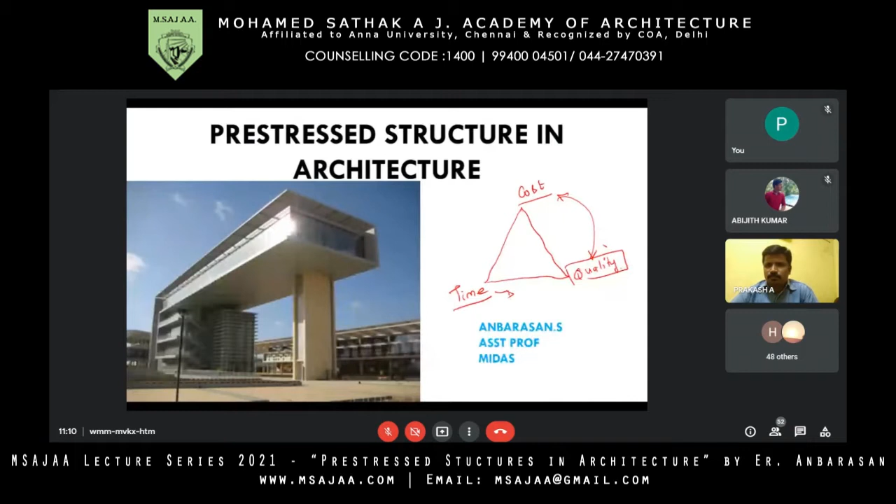So the prestressed type of structure will have these three concepts. I mean, it will be completed on time, and cost-wise, it will be very optimum when compared with the normal RCC type of structure. Then quality: the lifespan of the structure will be much higher when compared with the normal RCC type of structure. Let me first describe the basic difference between concrete, reinforced cement concrete, and prestressed concrete. Hopefully you all heard about the concept called concrete.

So it's a composite material which will have fine aggregate, coarse aggregate, water, and cement. This is a composite material which will have cement, fine aggregate, and coarse aggregate. Along with that, if we want to enhance certain characteristics, we will have one more material called admixture. Say if you want to increase the setting time of the concrete, we can go ahead with mixing of the admixtures.

And characteristics. Concrete is used universally because it has wide characteristics. First one is its durability, next is the modulus of elasticity, and the third one is change in volume. Hopefully you may have heard concrete is elastic in nature, so it will have a tendency to contract and expand. Next is workability. The minimum setting time starts with half an hour to a maximum of 24 hours. Next is strength, and next is cohesiveness. Due to these wide characteristics we've been using it universally.

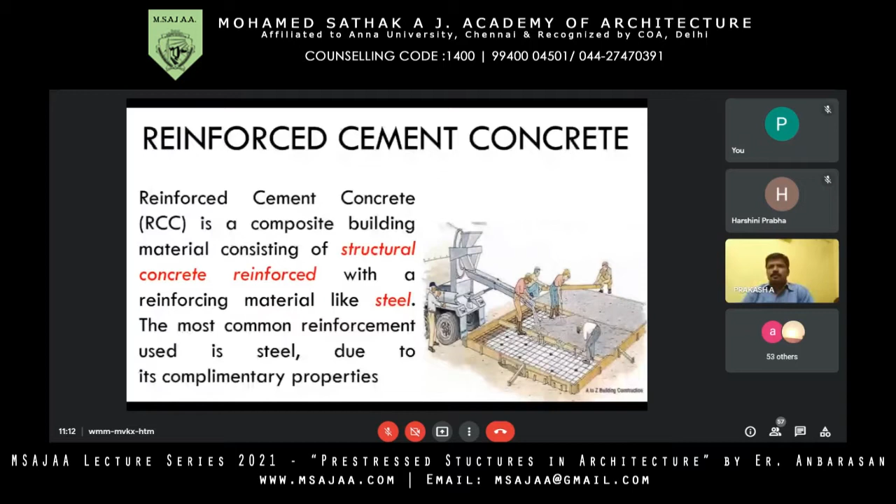And the next is reinforced cement concrete. Along with the concrete, we are using reinforcement. In order to increase the tensile strength in a structure, we've been using reinforcements. There are different types of loads in a structure, wherein I just said about the tensile load. Apart from normal live load and dead load, we have wind loads.

So a structure should be stable in order to take up the wind loads, or if there are any seismic impacts. A structure should be designed based on analyzing the seismic characteristics. Then if it is predominant to snow, we have to take into account the snow load also. So there are different types of loads to be considered while designing.

And these are the unit weights of different materials which we use in a structure. Brick has a unit weight of 18.8 kilonewton per meter cube, plain PCC is 24, RCC is 25, timber is 5 to 8 kilonewton per meter cube. So while designing a structure, we need to consider the primary load of each and every component we are about to use. Moving to the primary concept, prestressing. There is a basic concept behind using steel and concrete in a structure.

So in steel, steel is strong in tension and it's weak in compression. And in terms of concrete, it's strong in compression and weak in tension. So pre-stressing is ultimately related to the weakness of the concrete.

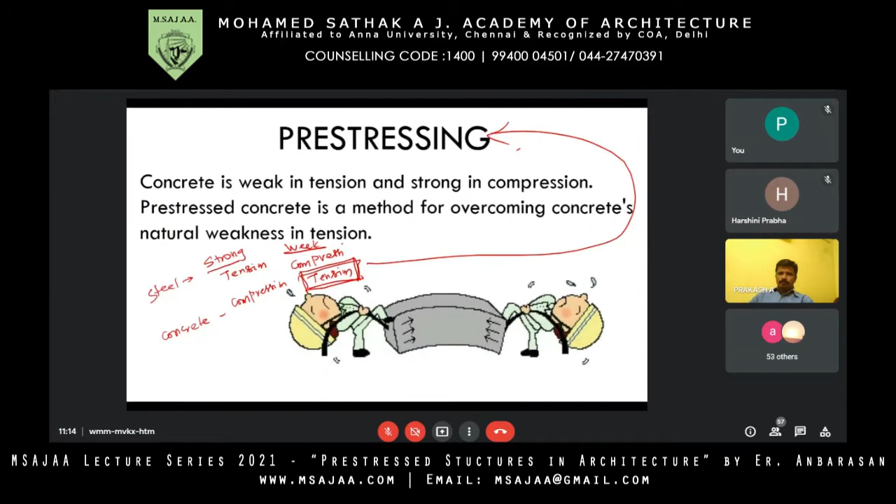Okay, so in order to improve the weakness of concrete in terms of tension, we are adopting a concept called pre-stressing. So this is how pre-stressing started to evolve. So we are going to have a normal process along with improving the tensile strength in a concrete. So this is a simple example.

A concrete beam will begin to bend when heavily loaded. So if you are using a normal plain cement concrete, then ultimately it will tend to buckle. So if the vehicle moves at a midpoint, then ultimately this leads to a failure. And in order to avoid the failure, if we are using a reinforcement in a frame or in a road, ultimately this will take up the load.

And if you are using a concept of pre-stressing, ultimately this will maximize the tensile loads because already it will attain the maximum load characteristics. So this will completely eliminate the weakness of the concrete. That's the primary concept, the need for pre-stressing.

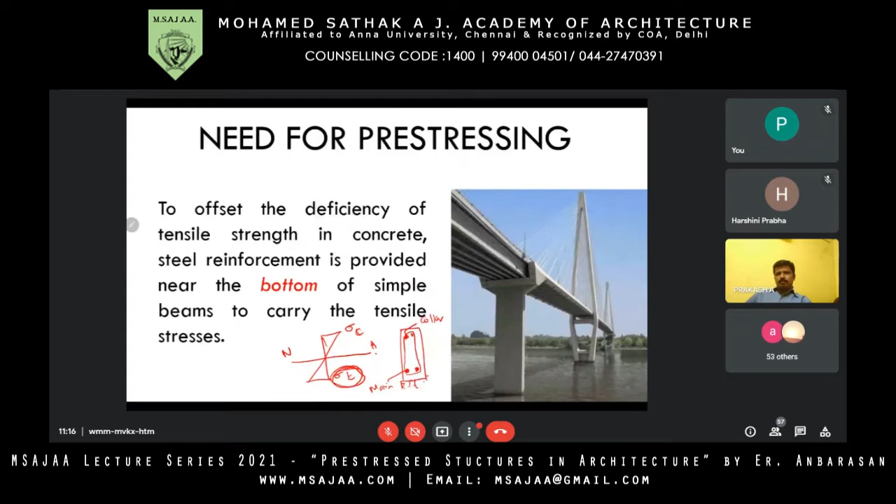So if you take any beam structure, we will have a compression and we will have a tension. So compression will happen at the top and tension will happen at the bottom. So that's the main case. We will have a bottom reinforcement in a single reinforcement. We will have collar bars at the top and the main reinforcement at the bottom, since the tensile load will occur at the bottom of any type of section, whether it is a beam or slab. So that's a primary concept.

And what is pre-stressed concrete? Okay, so if you are considering a normal beam, when load is applied, it tends to buckle in a downward direction based on the imposed load. So say if the imposed load is 50 kilonewton per meter square, it tends to buckle in this way.

If you are introducing tensile bars at the bottom, where they will take up the tensile load, when they get tensioned at the starting phase or after concreting, since the rod is already tensioned, the deflection will happen in the upward direction. So occurrence of the load and neutralization of the load will happen simultaneously. So this is how it will get balanced, the upward force followed by downward. So this is the primary concept behind pre-stressed concrete.

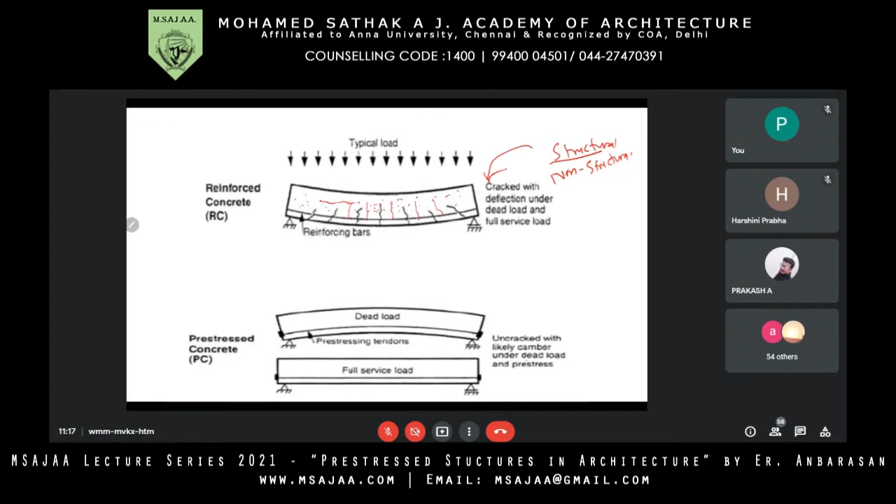And we have micro cracks. There will be porosity in a concrete. Due to the porosity and the aging of the concrete, ultimately the pores will tend to connect and form root cracks like this. So hopefully you all know that there are two types of cracks: structural cracks and non-structural cracks. So mostly the structural cracks will happen because of the porosity gaps in the concrete. So pre-stressing techniques will completely remove the cracks which will be formed in the concrete.

So we all know that after concreting, we cure the concrete for 28 days for reaching the maximum saturation time period. And if we carry out pre-stressing techniques, then ultimately we can completely retard the porosity gaps. So this will completely enhance the quality of the concrete. And this is the one which I said, the pre-stressing tendons provided at the bottom, and due to this, tension is induced in the tendons or in a bar.

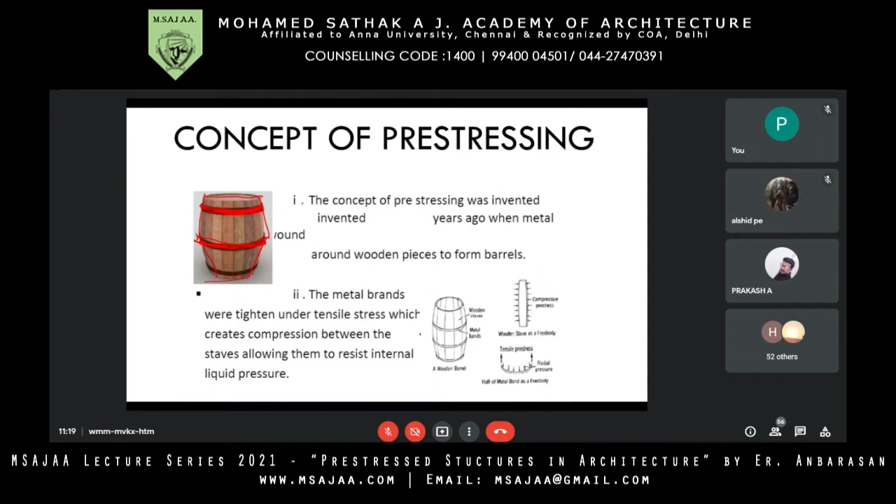So this bounding steel will ultimately enhance the tensile strength, and it will make the barrel stable. So if you are using a composite material, the material which has the maximum characteristics will ultimately enhance the quality of the material.

And this is the second example. It's the spokes of the wheel. So you can see the spokes, and you will have an outer rim. So when spokes get loosened, there will be a tightening setup like this, through which we can increase the tension.

Maybe, like in a cycle service center, you can see there will be a wheel-like arrangement. So they will cross-check the rotation based upon the tightness of the steel frames in the rims. When we increase the tension in the bar, ultimately that will reach the maximum saturation. So through which there will be a proper circle.

And in terms of concept, it will have three concepts. First is pre-stressing to transform the concrete into an elastic manner. So as I said, concrete is completely an elastic material. It tends to contract and expand. And second is pre-stressing for the combination of high strength steel. You may have heard about HYSD bars; high yield strength deformed bars can be used for the pre-stressing type of techniques along with the concrete.

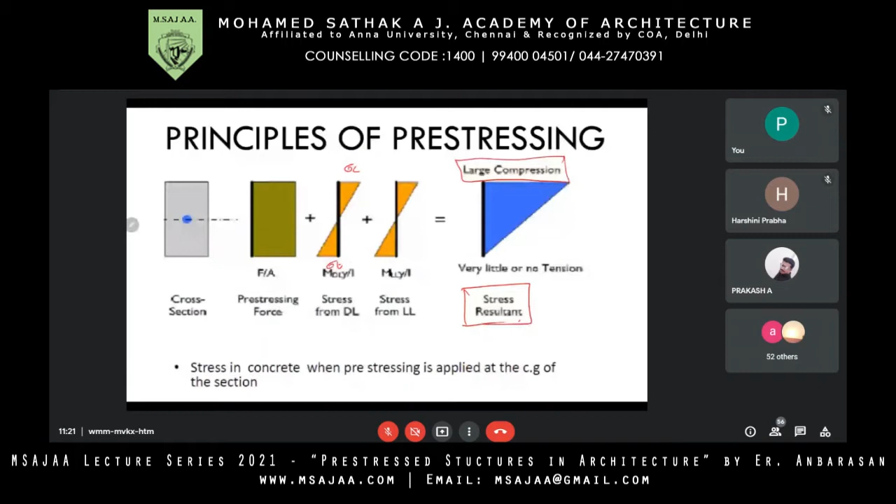Hopefully you all know that this is a cross section of the beam which has pre-stressing forces. And as I told you, this is sigma C and this is sigma T value. So this is a complete stress resultant based on the pre-stressing techniques, where we have a large area of compression. And here we are countering the tension which has been imposed at the bottom due to the pre-stressing concepts.

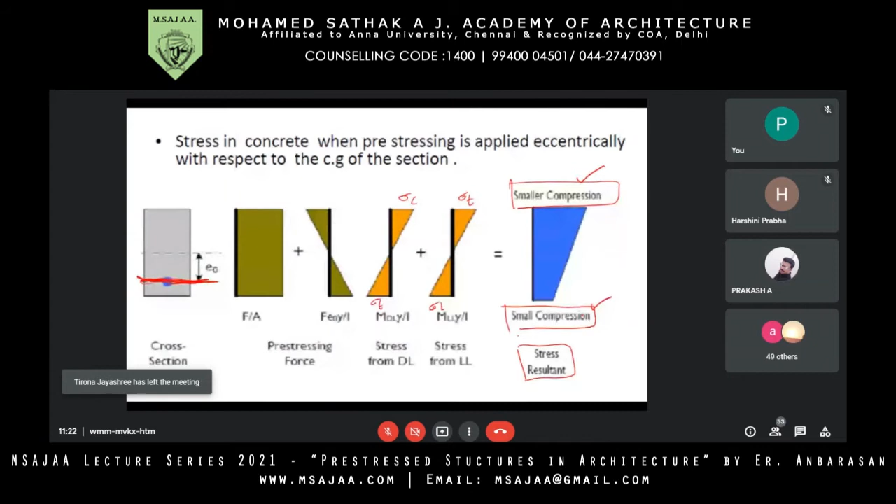Ultimately, sigma C value and sigma T value will get neutralized, or balanced, through which at top and at bottom we will have smaller compression. So this is a complete stress resultant. So ultimately the stress, in terms of compression value and tension value, gets neutralized based on the pre-stressing concepts.

Stages. There are different types of stages in pre-stressing. First one is anchoring of tendons against the end abutments, second one is placing of a jack, third is applying tension to the tendons, fourth one is casting of concrete, and fifth one is cutting of the tendons.

So this is the first stage, wherein after finishing the form works, say this is a bay where we are going to have concrete. So at each and every specific spacing, we are introducing a cable at periodical phases. So this is the first stage, anchoring of tendons against the end abutments.

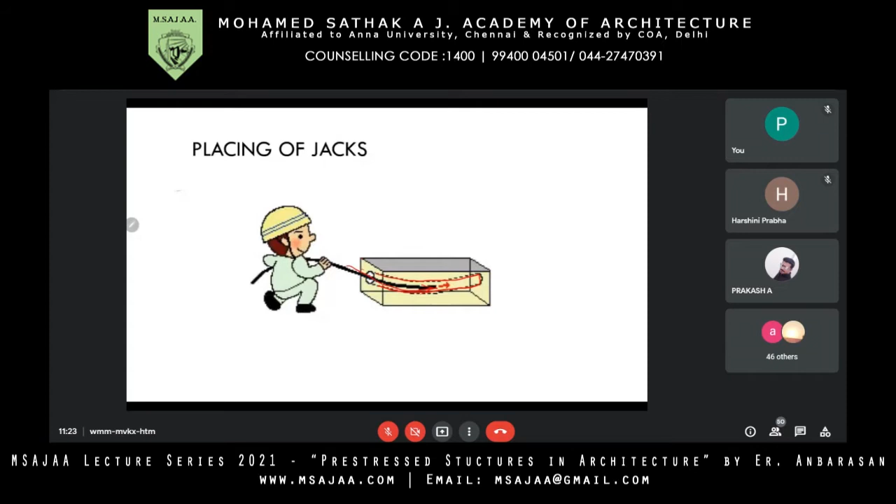And second one is placing of jack. So we are providing a pipeline and we are introducing jacks. So at the side of the column or side of the slab, we have anchoring supports. I'll show you the picture of the anchoring supports, how this will work. So at the side, we will have an anchoring support, and associated with it, we have a peg setup to hold the bars. And placing of the jack is the second one.

And the third is applying the tension in the tendons. So before introducing the concrete in a structure, we apply the tension in the tendons. So ultimately it reaches the maximum saturation point. And fourth one is after tension at both the ends, we are casting the concrete.

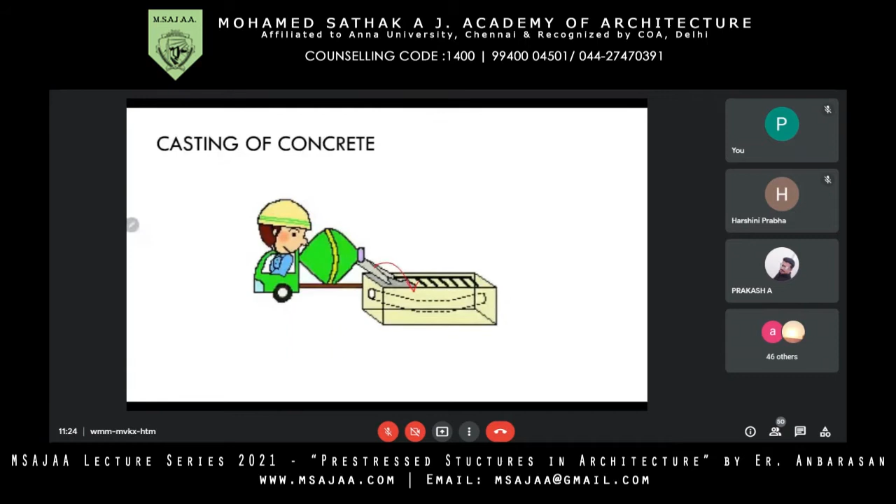So in the 1970s and 1980s, we had timber structures, timber sleepers. So when a train goes on timber sleepers, you may hear creaky sounds. It's mainly because of the contraction and expansion due to alternation in the weather conditions. The wood will contract and expand, so the spacing of the rail will get widened or contracted, due to which there will be a creaking sound.

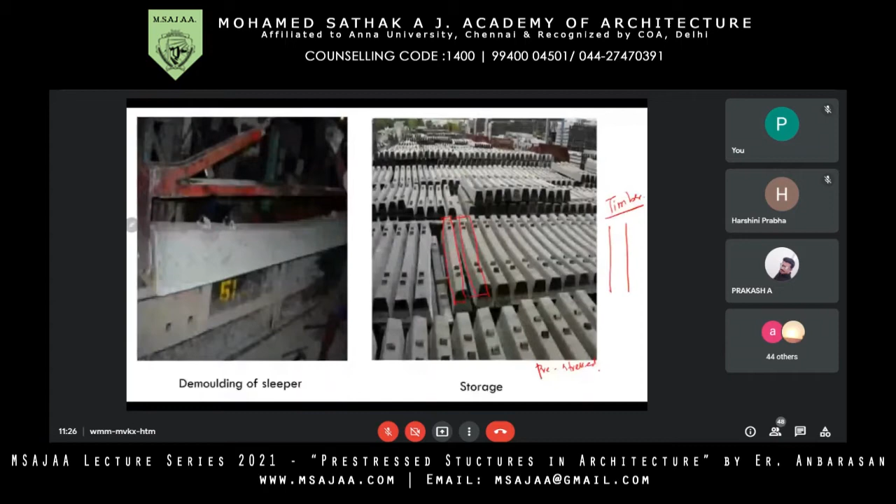So in order to avoid that, these pre-stressed sleepers are being used. These are made completely by the concept of pre-stressing. First is the preparation of the bed, and this is the end abutment or anchor supports. A hydraulic jack will be provided at both the ends, and it gets expanded at both the ends. When it gets expanded at both ends, then we apply concrete on the bed.

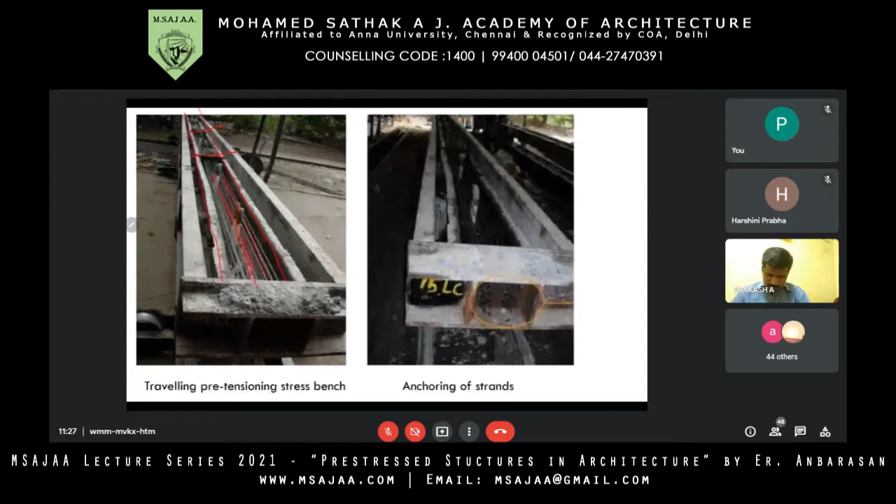And the third stage is cutting the tendons. If you have extra tendons, they will be removed. So this is a picture which shows the execution of railway sleepers. This is the big bay where we have casting spaces. Bars will be provided in this way. At the end space, look here, you will have anchoring of strands. So all the bars will be erected in this way.

And the next stage is stretching of strands. This is the hydraulic support by which it will get expanded. Look here, this is the normal space, the initial gap, and this is the expanded gap. After tensioning, this much of space is expanded.

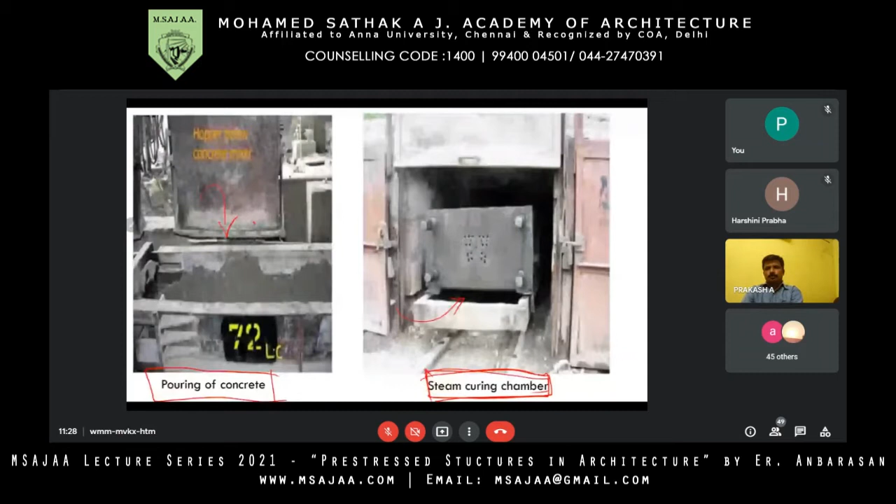So if you want to produce the concrete in a large, lump sum manner, this stage is pouring of concrete and this is the steam curing chamber. If you want to make it quickly, they introduce it into a steam curing chamber. Next is demolding, removing the sleepers from the formwork. Next is storage. Initially they immerse them in water for 28 days, then this is open storage. So this is how pre-stressing works in a linear way.

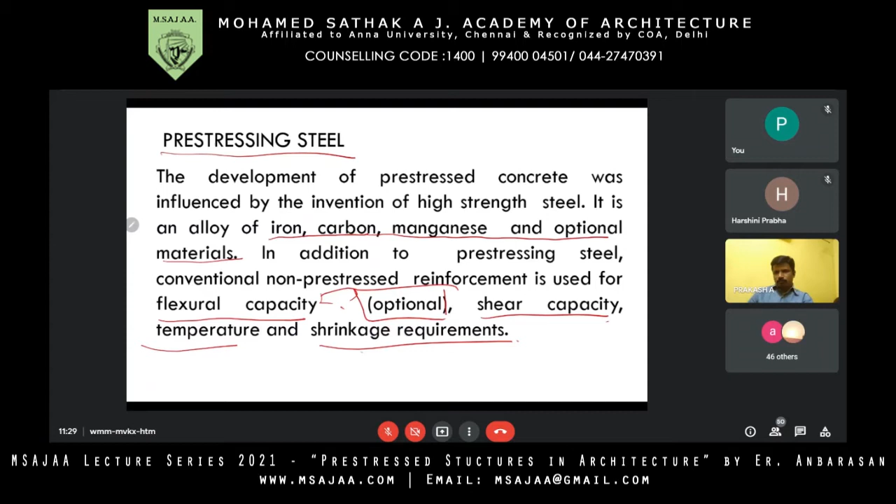Pre-stressing steels. As I told you, pre-stressing steel plays a vital role in this type of concrete structure. It is a combination of iron, carbon, manganese, and optional materials. Conventional non-pre-stressed reinforcement is used for flexural capacity; it's optional in terms of flexural capacity, shear capacity, temperature, and shrinkage requirements. There are different forms of pre-stressing steel being used.

This is a normal wire, when we have a single one. Strands: 2, 3 or 7 wires are wound together to form a strand. Tendons: a group of strands or wires wound to form a pre-stressing tendon. Cable: a group of tendons. Ultimately, each one is interrelated. Bars: a tendon can be made up of a single steel bar. The diameter of the bar is much larger than that of the wire.

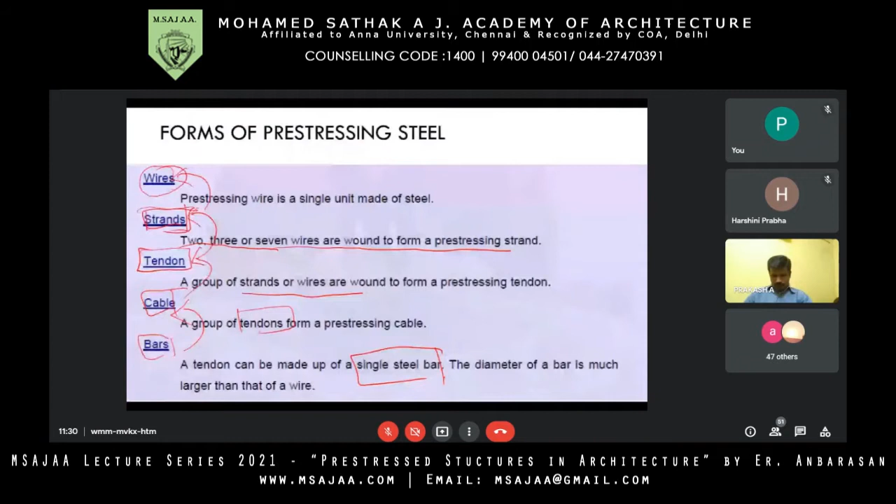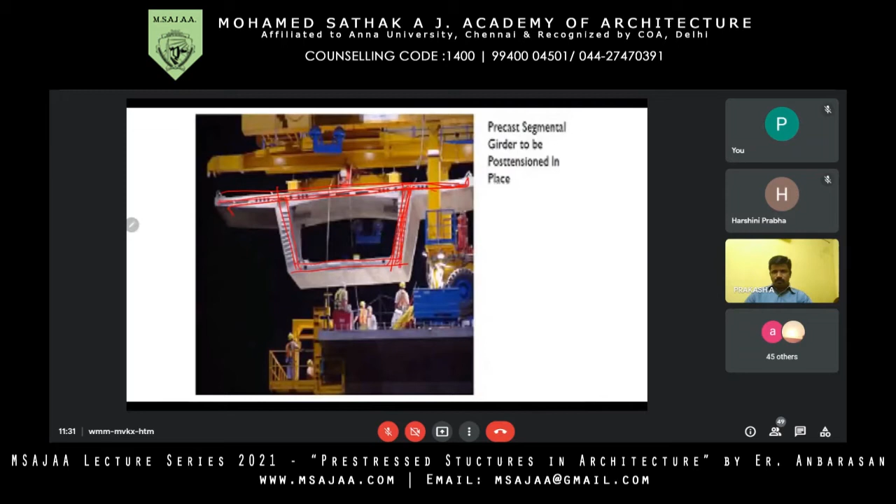And this is a sketch which shows a deck slab. It's a completely precast segmental girder. In most cases you may see these types of girders and deck slabs, in metro rail projects and in bridges. It will be hollow. So in any bridge structure, you may have a hollow cavity like this.

So this will be an individual panel. Panels will be connected, and you will have steel frames. Look here, there is a cavity hole in these areas. So all these will be connected by using steel frames. Okay, so all these will come under a pre-stressed type of concrete.

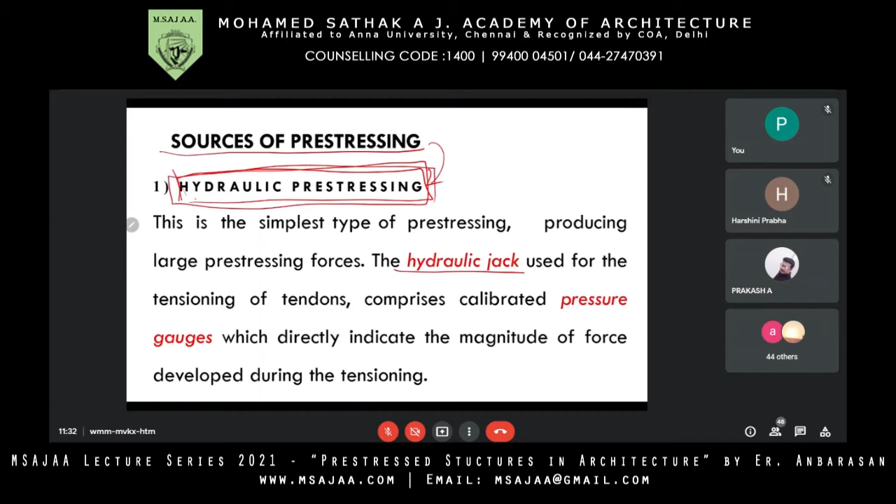So sources, how we get extended. Okay, first is based on hydraulic pre-stressing, by using hydraulic jacks. It will be typically similar to the working process of a JCB. You may see in a JCB there will be buckets. The oscillation or movement of buckets, everything will happen based on a hydraulic process. The same thing will be applicable for pre-stressed techniques. There will be hydraulic setups through which the tendons will get expanded. Okay, so that's the first type.

And next is mechanical pre-stressing. You may come across pulley type concepts, where heavy loaded machineries will be lifted by mechanical pre-stressing. So with or without lever transmission, gear transmission, in conjunction with pulley blocks, then screw jacks, or with or without gear drives.

Electrical pre-stressing, this will be a process wherein the steels are electrically heated. Initially it will get heated and anchored before concreting in the mold. When it gets heated, ultimately it reaches the maximum saturation. You may have heard a term called the stress strain curve. So you may know how stress is directly proportional, and later on how there will be an alteration with the stress and strain values.

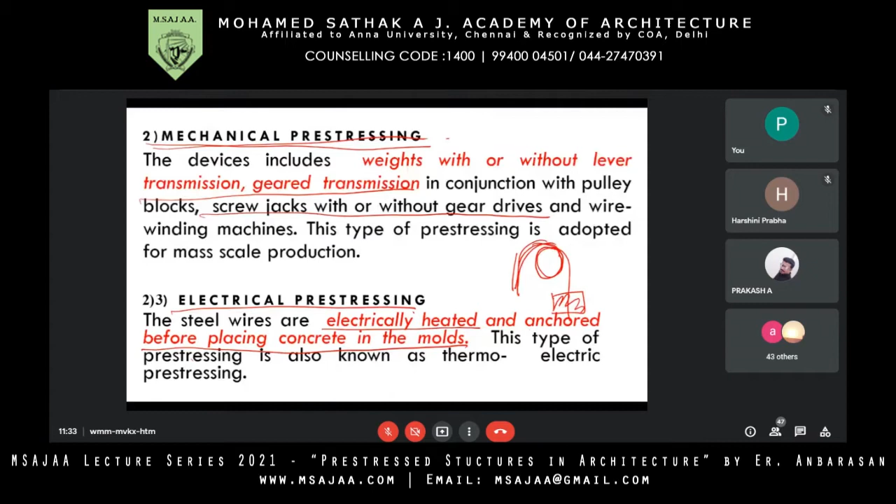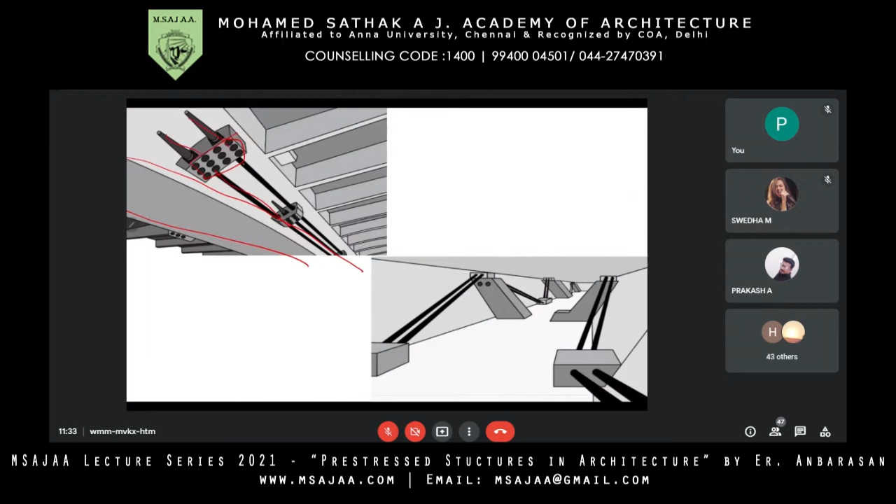External manner. See, look here. These are all provided at the external face of the box girder. When the process happens at the external faces, it is called external pre-stressing. Okay, look here. This is a beam. All along the sides of the beam, you will have bar provisions pre-tensioned at the initial stage itself. So this is the beam setup. All along the sides of the beam, you will have tendons, and these will get pre-tensioned at the early stage itself.

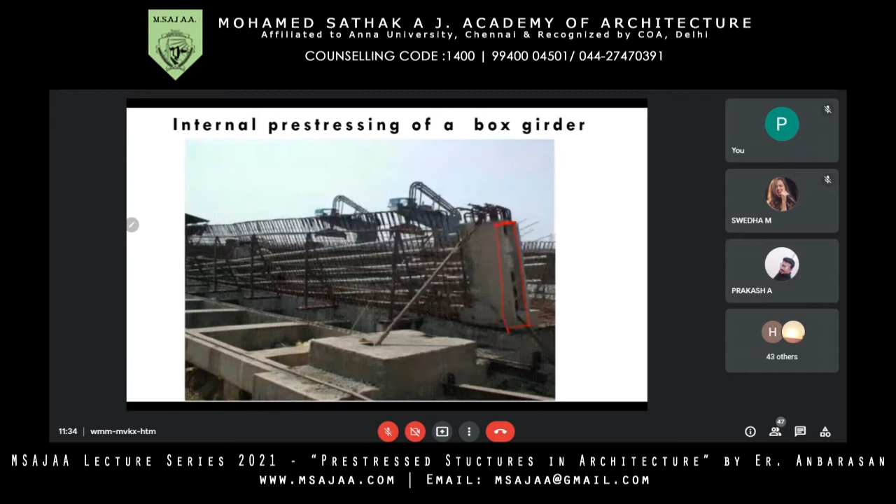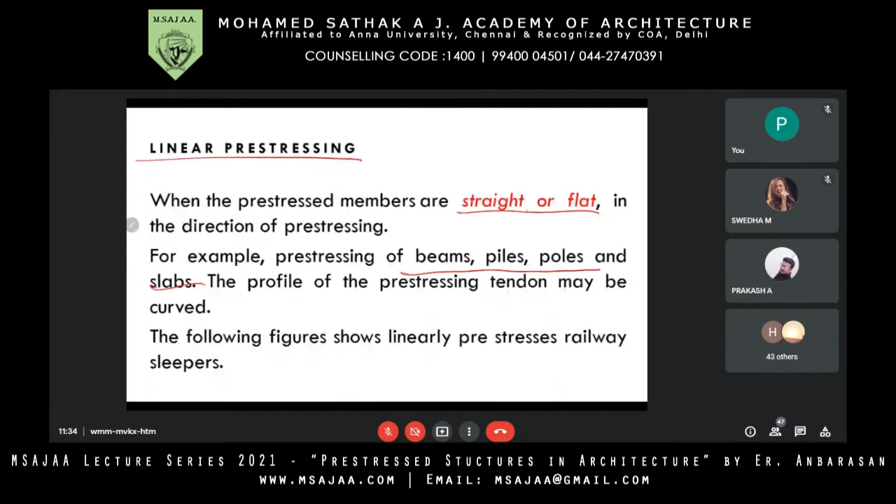So that's the one I'm about to say. Linear pre-stressing. It's straight or flat in nature in terms of direction. For example, beams, piles, poles, and slabs all come under linear pre-stressing. It will be a one way process; the reaction will happen in a linear way. That's why it is named linear pre-stressing. And as I told you, this is for railway sleepers.

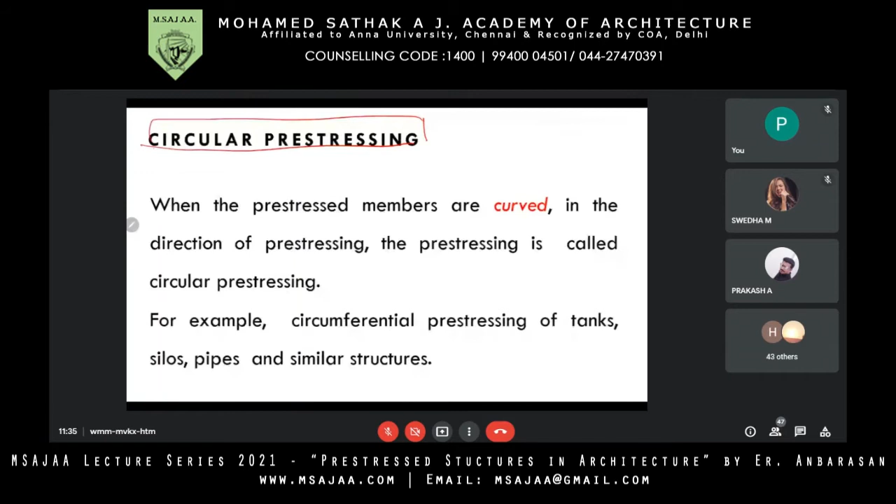And there are certain limitations while executing pre-stressing techniques. It is a completely skilled type of technology and it requires skilled labor. And use of high strength material is costly. If you are doing a large scale project, then ultimately this will be economical. There is additional cost in terms of auxiliary equipment; the equipment used for pre-stressing will be a little expensive, so we may hire the equipment.

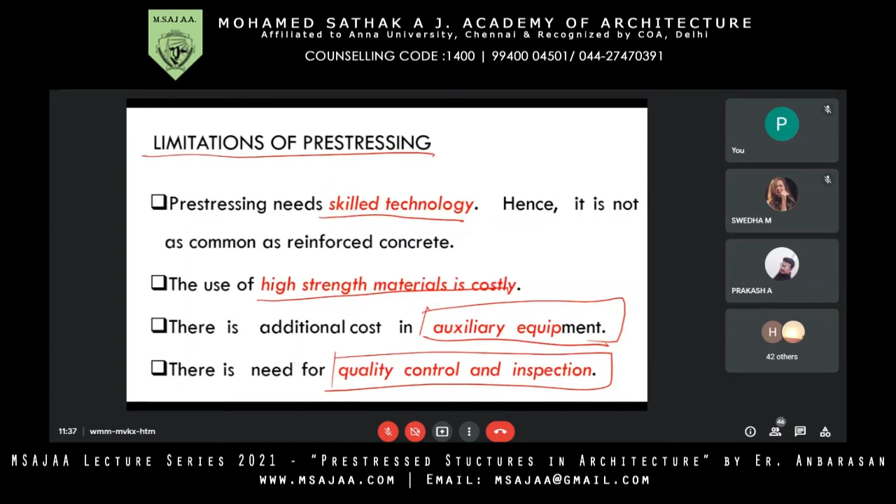There are different types of advantages. It needs less labor, smaller and lighter structures. There won't be cracks, and the entire section is used to resist the loads. It has a maximum life period and better corrosion resistance. It is good for larger projects such as water tanks, nuclear power plants, etc. And it is effective for deflection control.

If we have advantages, ultimately we have disadvantages. As I said, if you are doing a smaller scale project, this is not an economical one. And it requires a pre-stressing bed. If you are casting a structure on site and reassembling it, then ultimately it needs a pre-stressing bed.

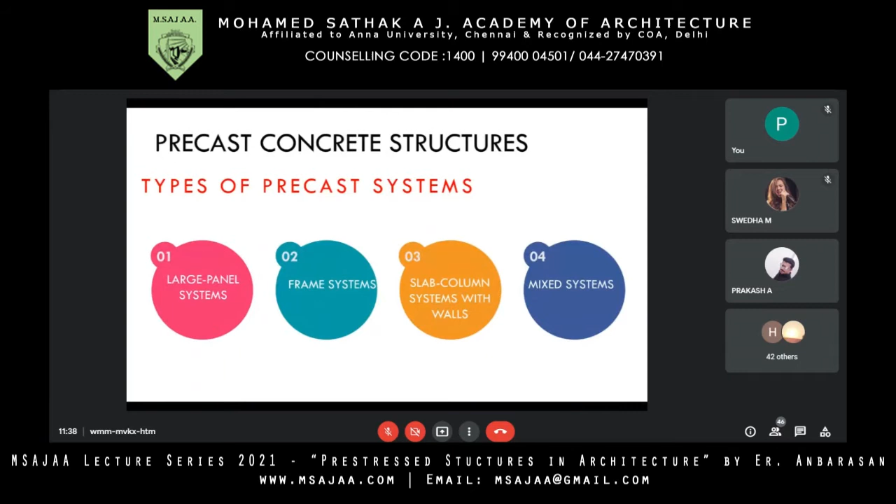Next is the framed system. In a framed system, we have all structural components such as columns, beams, and the frame.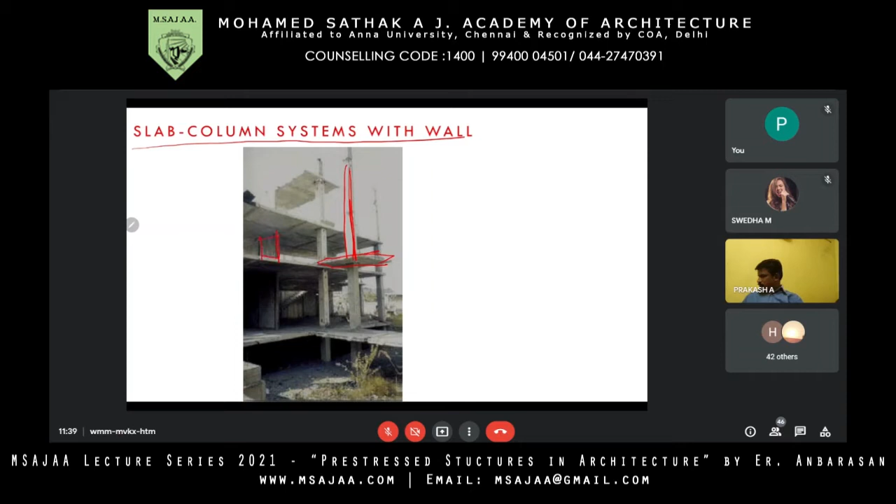Third is the slab column system with walls. This is a single setup with slab, and this is a slab, and this is a column. You will have wall arrangements over here. So all these are different individual panels that get assembled in this way.

Now these are different types of precast members used for a structure. First is the T type of section, and this is double T. This is hollow core, this is pile, and the L shape will be applicable for any intersections.

Next is the inverted T section. It will be used when we have 3 intersections. And the last one is the I girder, which is most often used for larger structures.

Now these I girders are being replaced by box girders. In most metro projects and airports, you can see these square type box columns or square columns being used.

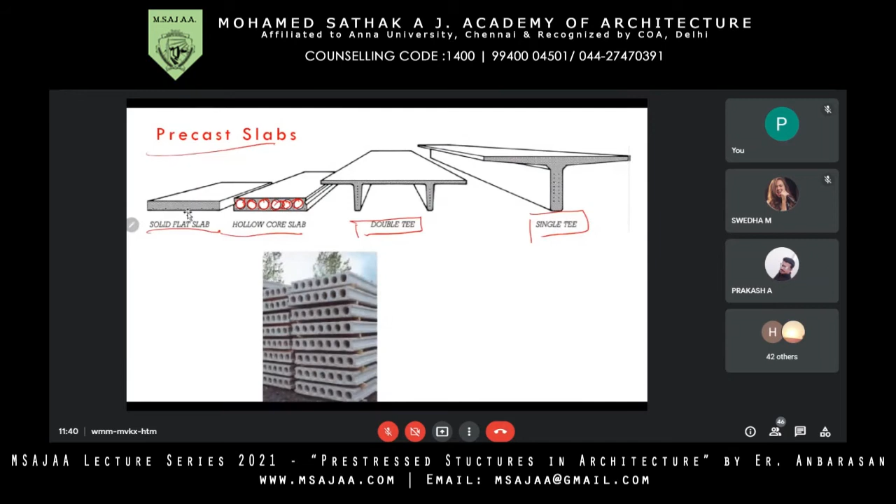Precast slabs come in different types. First is solid flat, then hollow core - hollow core is light in weight and 100% sound insulated. Then there's double T and single T. Different types are used based on different cases.

This is the precast beam and girder. As I told you, it will have a top bar arrangement, so this will get assembled with the connecting members, maybe a slab or a column, whatever it may be. This will get connected with another panel.

Precast column - look here, you will have a support structure like this with beams and columns. Slabs will rest on top of this. At the top you can see the bars provided at the top faces in order to connect with the slabs, which get suitable anchorage at the sides. On the left hand side you can see there is a proper support for slabs, so the slabs rest on these frames like this.

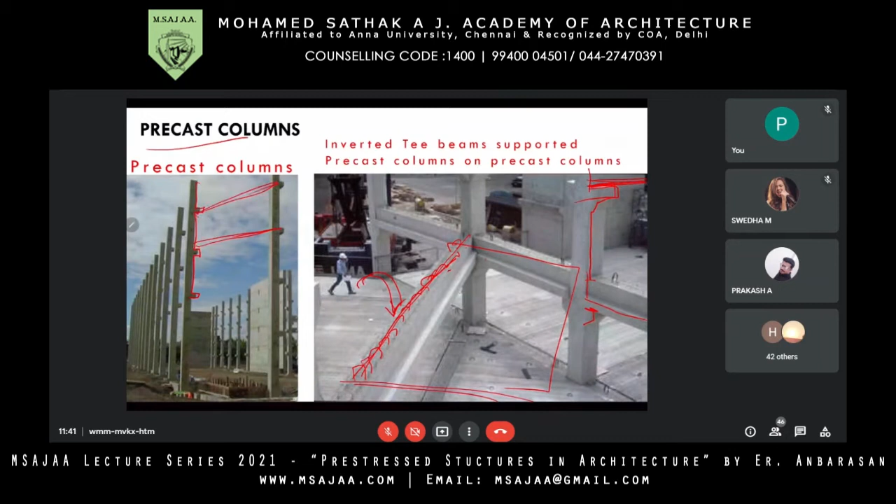This is precast walls. Nowadays all walls, all partitions, everything is done based on these pre-stressed type of walls. Wherever we need a space requirement, we can pre-plan accordingly and cast based on the requirements, with lapping arrangements so one gets connected with the other.

This is a precast concrete stairs. Everything gets assembled in a different individual way and connected at each setup. Look here, this gets connected with the support provisions.

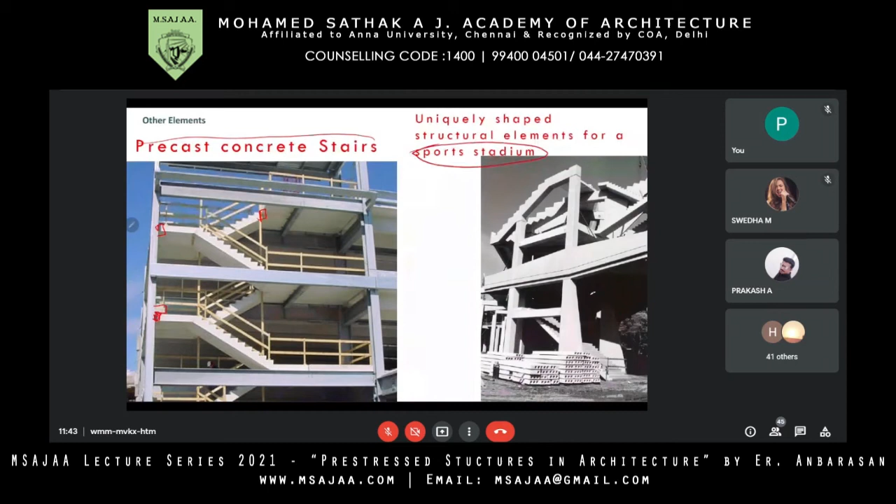On the right side, this is a sports stadium, customized based on the requirement. All these are hollow slabs - as I told you, the usage of hollow slabs is good because they are very light in nature.

This is the complete precast structure used in a building. It has party walls, facade walls, precast stairs, a beam, and a roof slab. The precast facade wall also has opening provisions and everything.

This is a sketch which shows the different types of components in a building, all being a precast type of structure, precast type of members that get assembled. Even openings for pipes, everything in terms of services, are included.

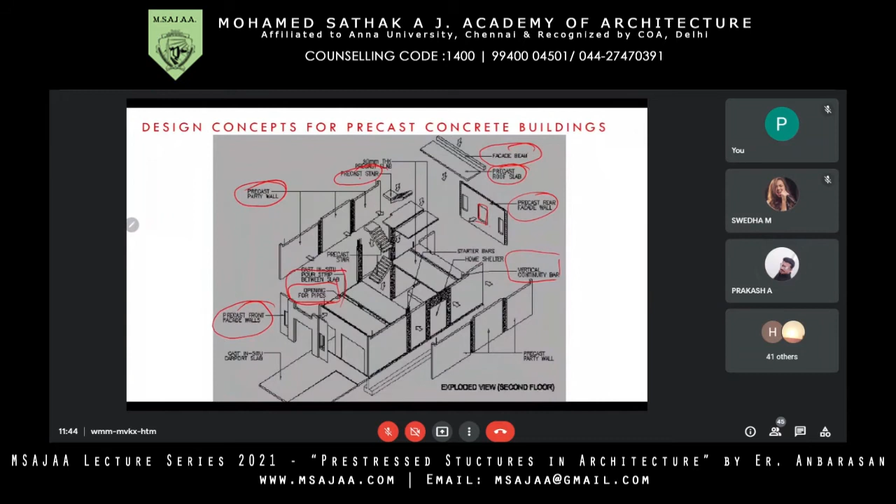This is a clear picture showing solid panels and hollow core slabs. This is a single core frame, and these are support provisions. The slab completely rests on the wall support like this.

This is a column to column connection. Typically, it is connecting one bar to the next consecutive bars in columns or in slabs. So we have arrangements by which we connect one column to the next consecutive columns, based on a nuts and bolts concept. Look here, this is a sketch which shows reinforcements, and this is a base plate.

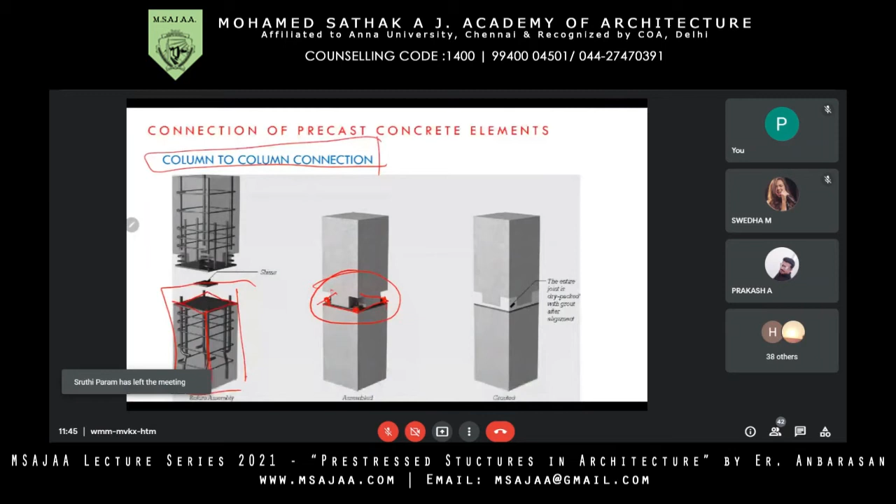Beam to column connections. This is a column, and this is part of the beam. It gets connected. This is the finished one, which has top reinforcements or bars. This pin gets connected with the slabs, and this is the extended, incomplete one.

This is a slab to beam connection. After connecting the beams, the slab panels rest on top. There will be a minimum gap, look here. The gap will be completely filled with grouting or sealant material.

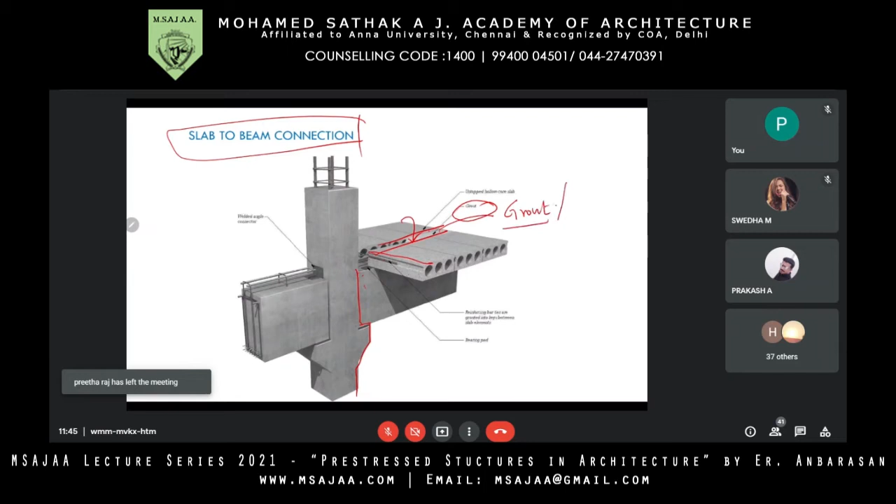Precast construction has a wide application, as I told you. It's rapid in construction, better in quality, reduces maintenance, and is suitable for repetitive construction mostly.

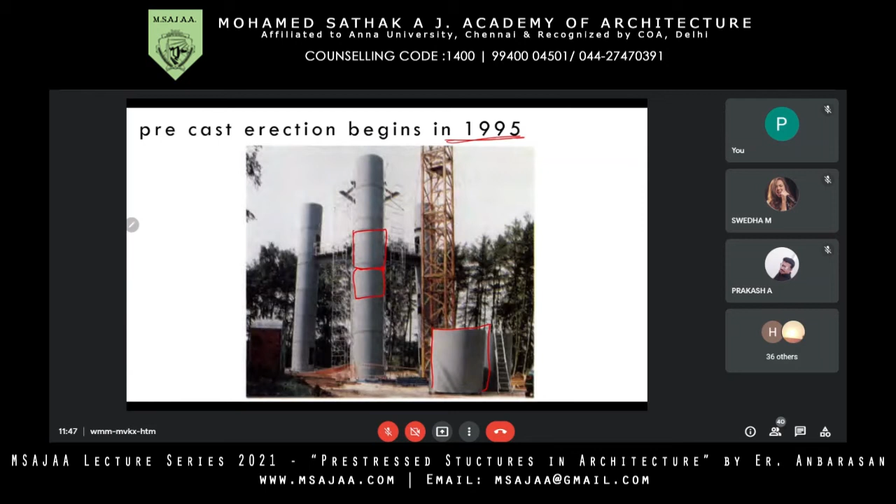It started in the year 1995. Look here, this is the tripod setup I told you about, and it gets connected. All these tripods get intersected at 76 meters, and these are each individual panels, which get assembled.

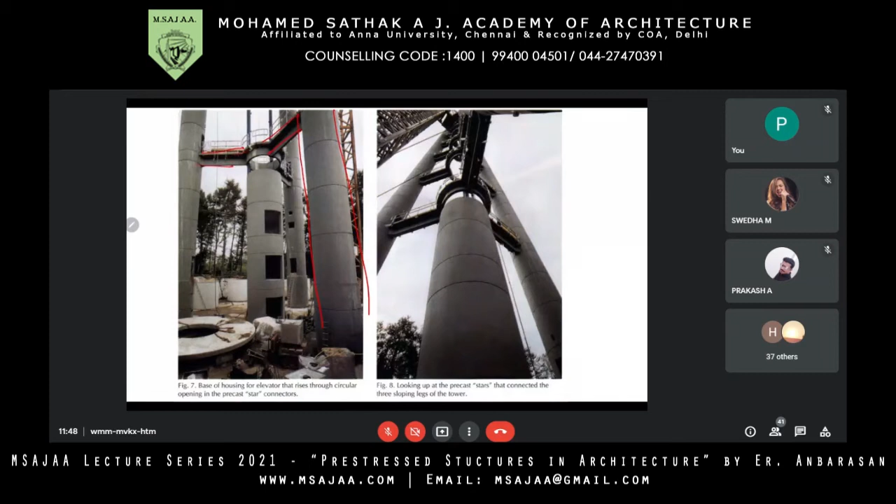All three tripods get intersected by a steel frame, because as I told you, this is the tallest type of structure. So when height matters, the wind load becomes higher. In order to overcome the wind loads, there are 3 anchoring supports for the tripod, connected by a median between one support and the next consecutive supports.

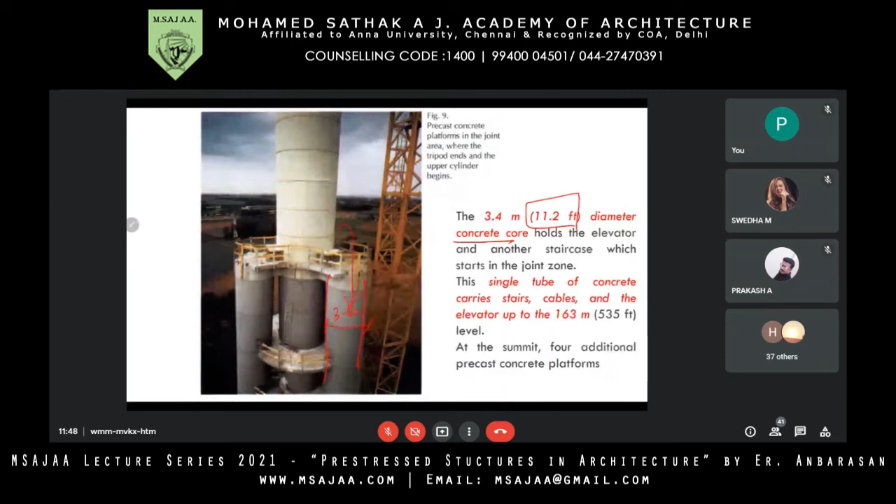So the diameter of the concrete core, one core, is 3.4 meters, about 11.2 feet. Inside the core you have all the types of services such as stairs, cables, and elevators, everything provided in this area.

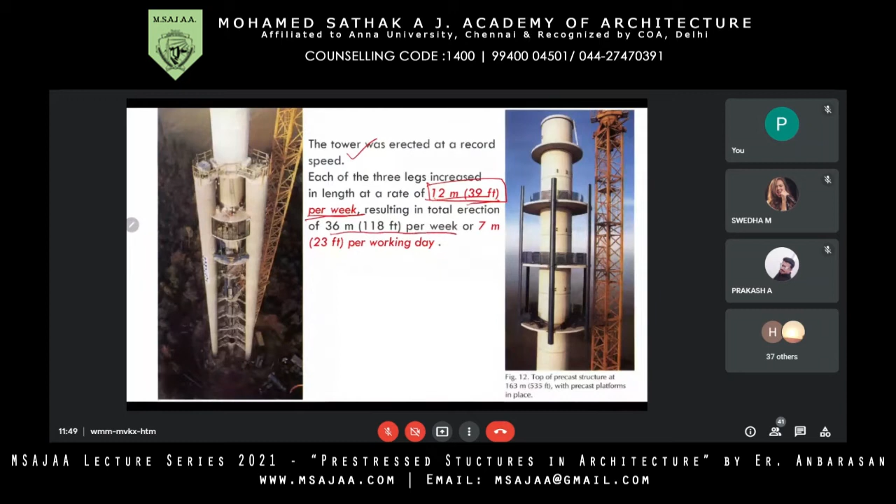So this is the tallest type of structure. This is an aerial, top view of the tower. The tower was erected at record speed, meaning the time of erection was very minimum. Each of the 3 legs increased in length at a rate of 12 meters per week, resulting in a total erection of 36 meters per week, or 7 meters per working day.

As I told you, at a top connecting face like this, you will have steel cores. These get connected and accessed at the top of the precast structure at 163 meters with precast platforms in place. Next is maybe like you may have heard about the Opera House in Sydney, Australia.

This is completely done based on pre-stressed techniques. It's designed by Danish architect Jørn Utzon in 1973. It has a concept of shells, portrayed like large white sails in contrast at the deep blue waters of the ocean. Still people argue that it has to be considered the 8th wonder of the world.

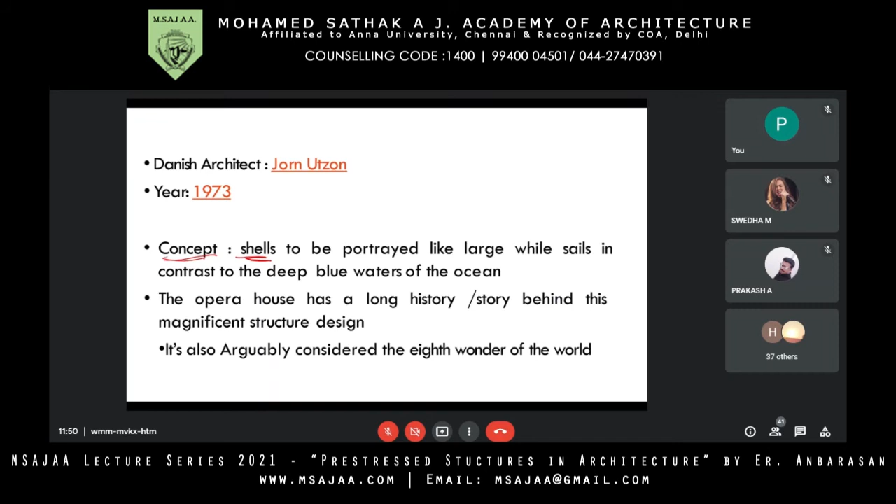The project was built in 3 phases. First is the foundation, as I said, because the complete structure lies in the sea. Building up the podium looks like Sydney Harbour. The construction of outer shells had certain structural problems still unresolved in order to hold the weight of the massive structure the shells are supporting.

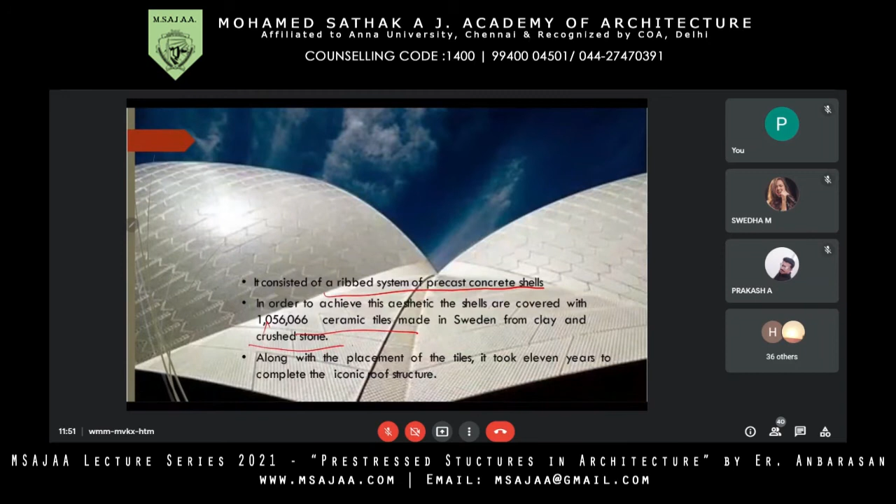As I told you, all these frames, panels, everything were prefabricated. It consists of a ribbed system of precast concrete shells, and there are around 1,056,000 ceramic tiles made in Sweden from clay and crushed stones, patched all along the top of the core shells. Including the placement of the tiles, it took 11 years to complete this iconic structure.

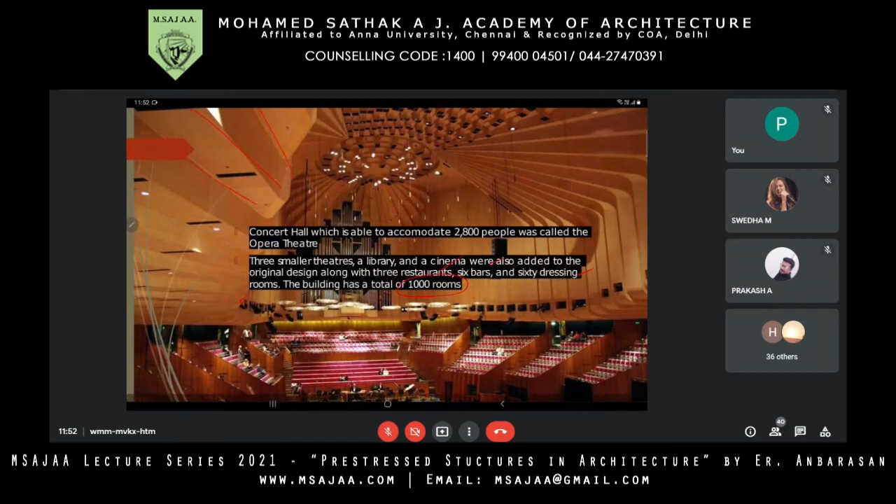Hopefully you all know it's an opera house, and associated with that it has 3 small theaters, libraries, around 3 restaurants, 6 bars, and 60 dressing rooms. It has a capacity of 1,000 rooms. So all these frames, everything was done based on pre-stressed type of structures and pre-stressed type of panels.

During designing itself, once the design gets over, ultimately they will hand over the complete design to the fabricators. So during the excavation or foundation stage itself, the precast panel members start to fabricate the pre-stressed panels.

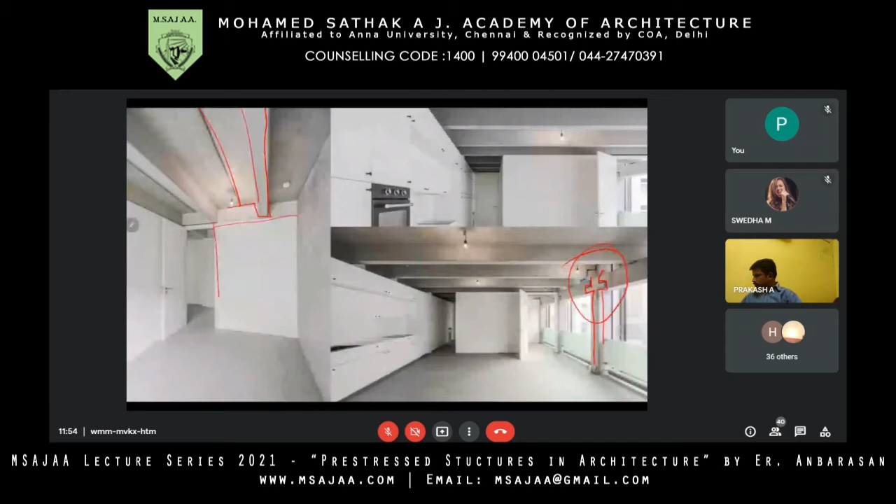Next is the most interesting one, the Jubilee Church in Rome. It was designed by architect Richard Meier and partners. Initially the church was framed or designed based on steel frame concepts, but due to time management and budget constraints, they changed the pattern.

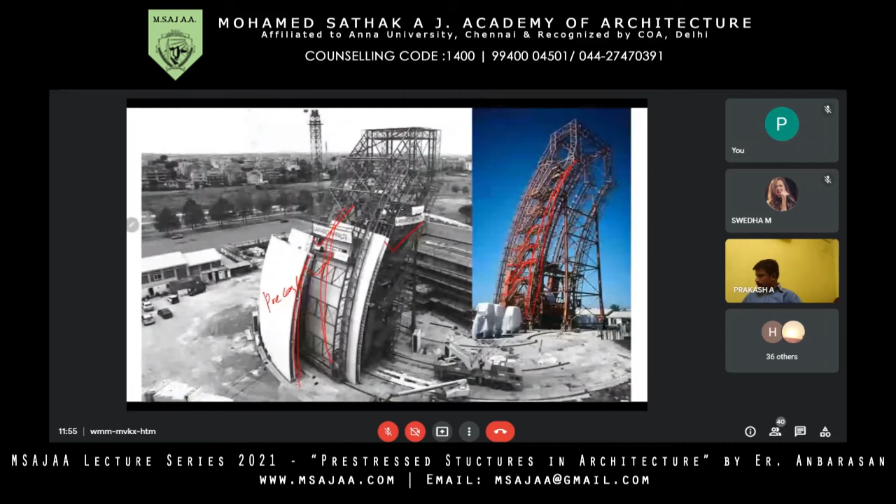So associated with the steel frame, they have connected 3 precast panels. All these are precast panels associated with the steel frames, and it has 3 facings. 3 curves are made up of precast concrete slabs, as I told you, and they are freestanding, and wind load is compensated by a cantilever effect through this.

They've clearly studied the orientation and intensity of the beam. Based on that, they framed 3 curved supports, pre-stressed panel supports, and even the light effect is framed based on these, so it gets reflected and you get a clear inner effect. The walls have inner and outer shells, so it's highly insulated. Height of the walls is 57 to 90 feet. Around 346 precast panel blocks were used for these 3 walls, and the geometry is designed to allow for repeatable formwork.

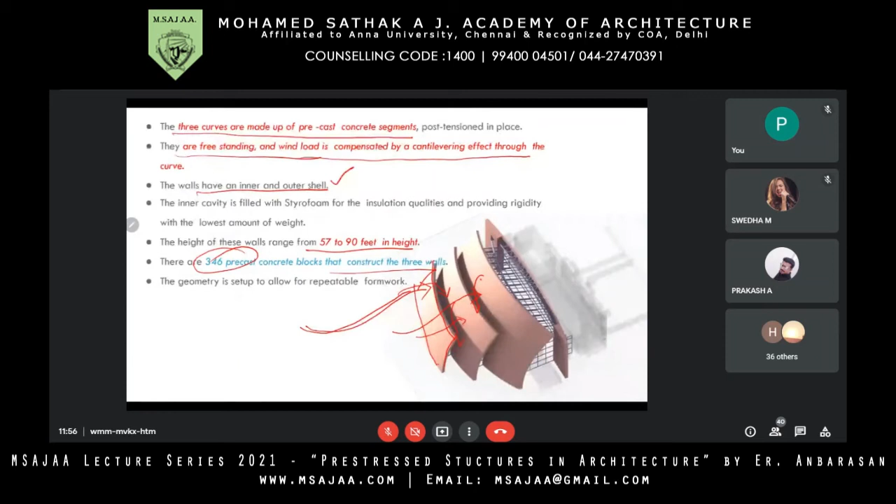So this is an east section, and this is a view which shows how, in terms of light effects and in terms of wind intensity, it is being carried out in a proper way. The glazed skylights suspended between the shells are lit by zenithal side light, and the nave is enlightened by constantly changing patterns of lights and shades.

So this being completely framed, panels, everything being carried out with proper and detailed studies. Okay, so this will overcome all the weather effects, seasonal changes, and everything.

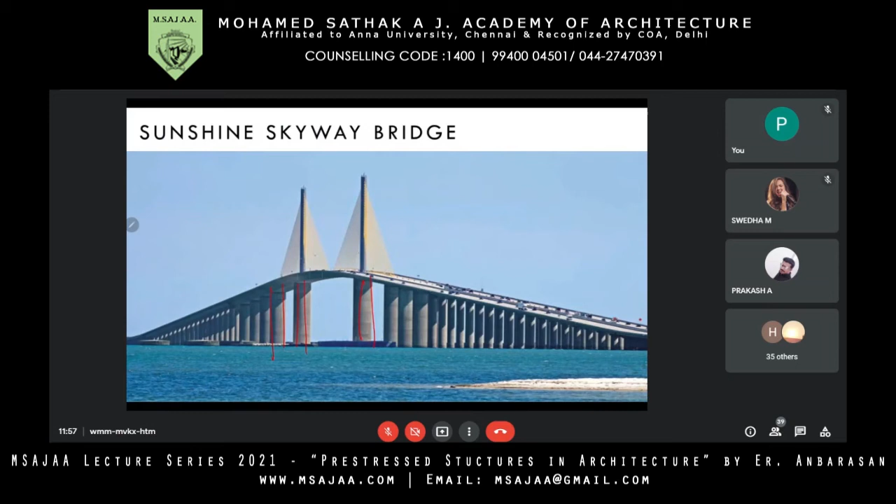The next is the Sunshine Skyway Bridge. So all these panels and frames, everything. This is typically like our Pamban Bridge. Okay, so this is the details of the bridge. It has 4 lanes, and the span length is 366 meters. Height is 131 meters. Look here, the total length is 6.7 kilometers.

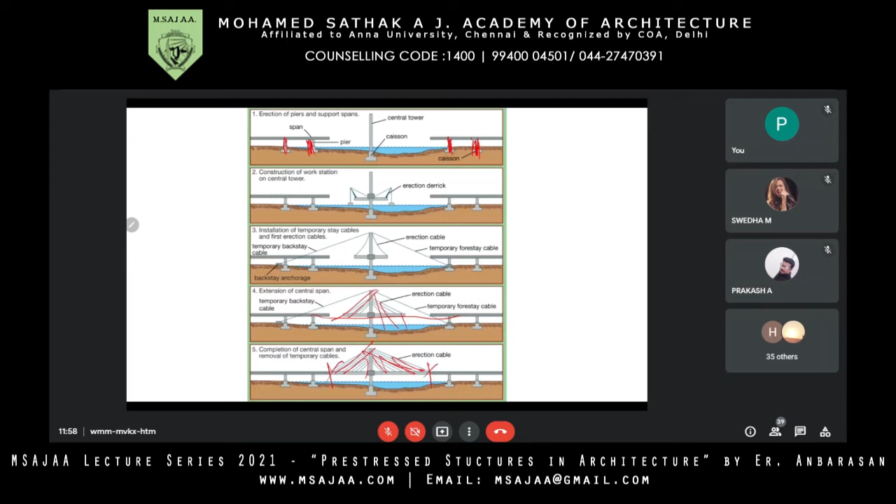Yeah, so this is the detailed drawing which shows how support is being carried out in the structure. At the end faces, we have supports, and these are connected by proper tendon supports at each and every frame, and this is all completely pre-stressed panels. I'll show you a live picture of this.

Yeah, this is how suspension bridges or cable bridges work. The tendons will carry the tension and the center core will take up the compression. So compression will get neutralized with the tension in this way. Yeah, this is a step.

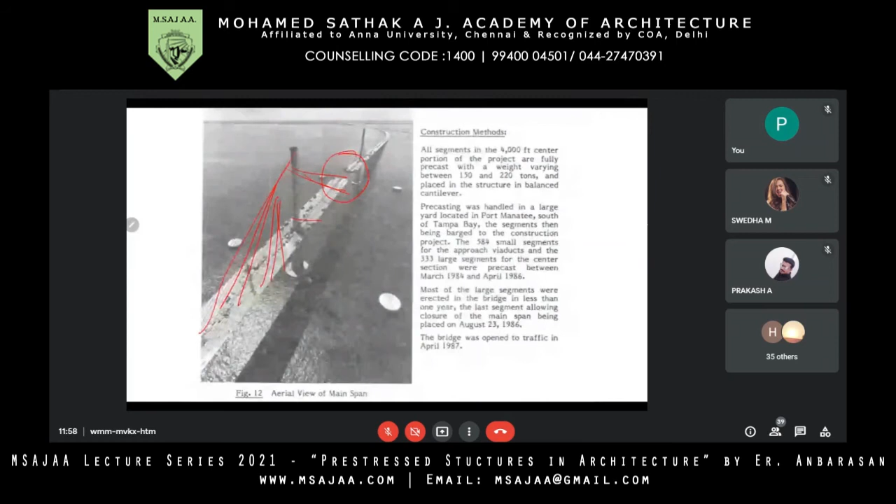This is the picture which I told you about. All these frames will have a tendon support. This will get connected, and in this space, it's an incomplete one actually. So this is a picture which shows how pre-stressed panels will get connected. Okay, so this is the maximum suspension cable. The overall length, it's completely a pre-stressed panel actually.

Yeah. So this picture shows how ships will cross the bridge, and over it you can see there will be a movement of vehicles.

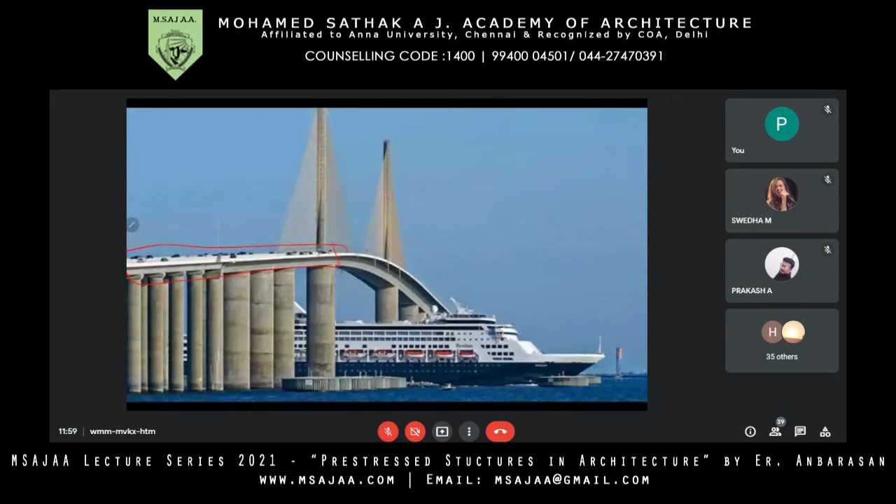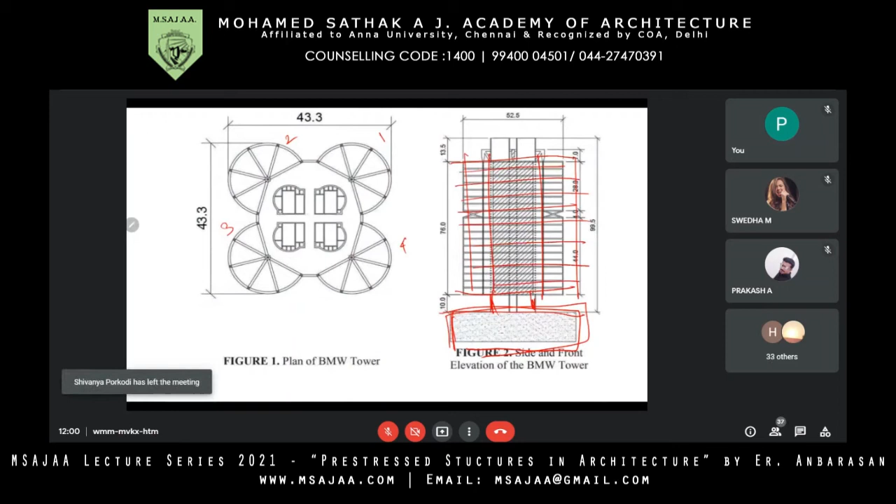Yeah, as I told you, steel hanger beams were then erected on the top of the shear core, and steel cables permanently suspend the structure above the ground. So this complete structure is done based on pre-stressed techniques. Thank you, and I'd like to show a video for pre-stressing, as I told you.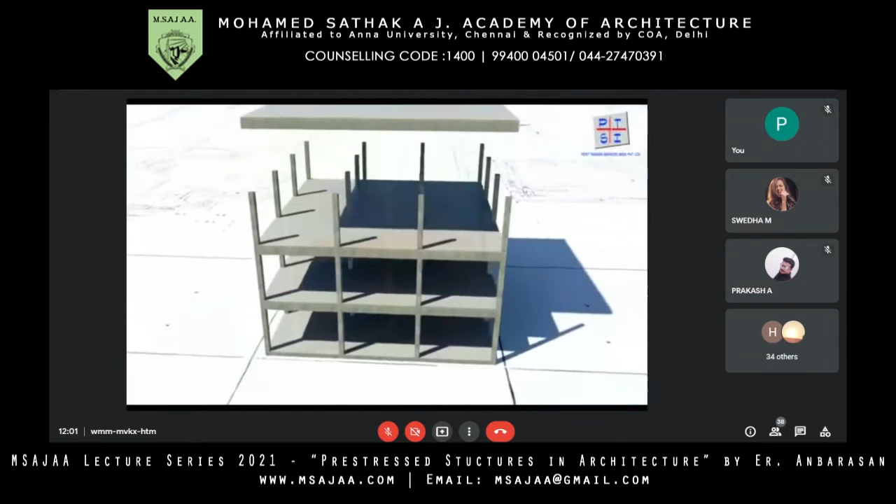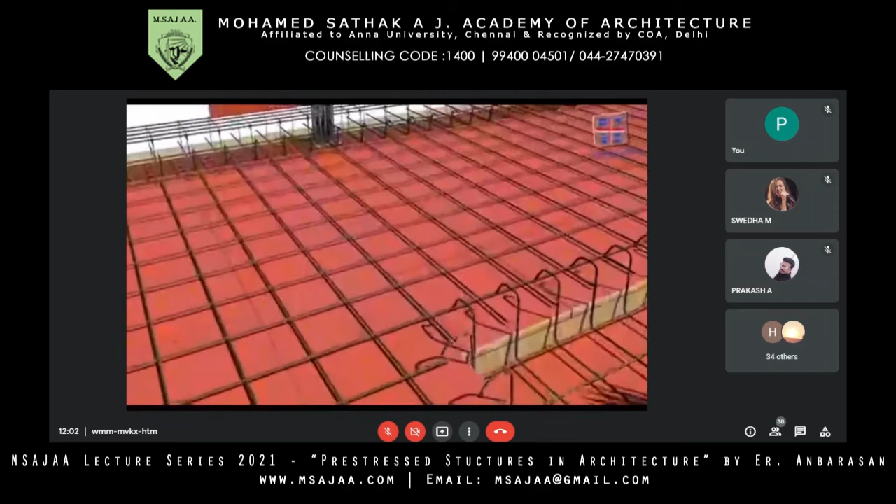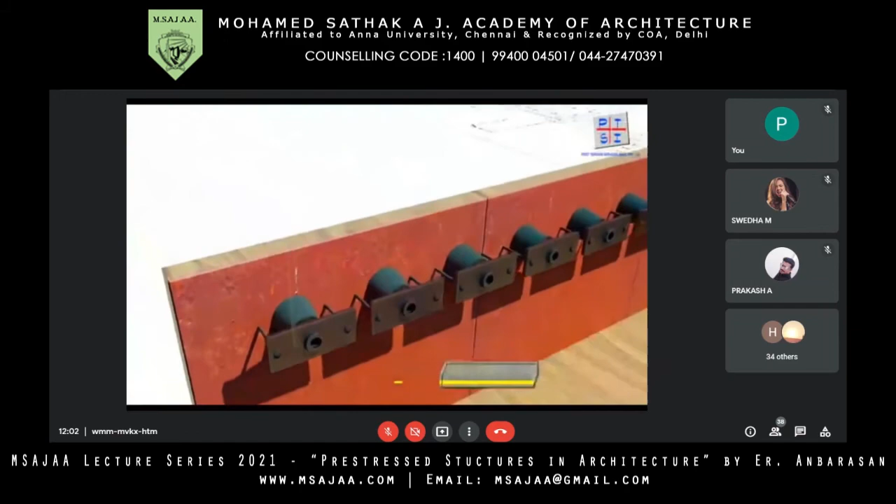So placing of formworks at the initial stage. Yeah, the formwork beam gets completed, and beam bars are provided at the sides. Yes, all along the sides of the beams, anchoring supports are provided at the end faces. So the anchoring assembly will get completed and be provided at the sides of each beam.

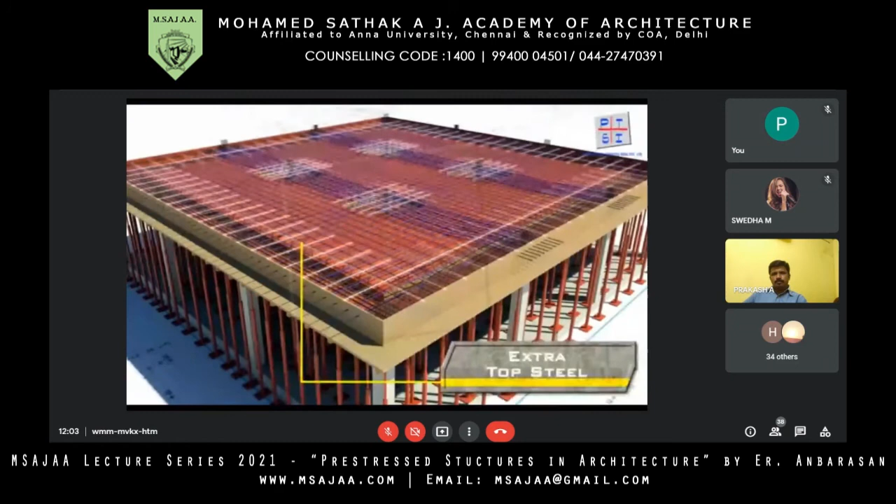As I told you, these are HT strands. At periodical spacing we are going to provide them, and they have an envelope which has been greased. So all the blue colored ones are the strands which we are going to tension. Normal slab reinforcement has to be completed. If needed, extra bars will be provided at the ends.

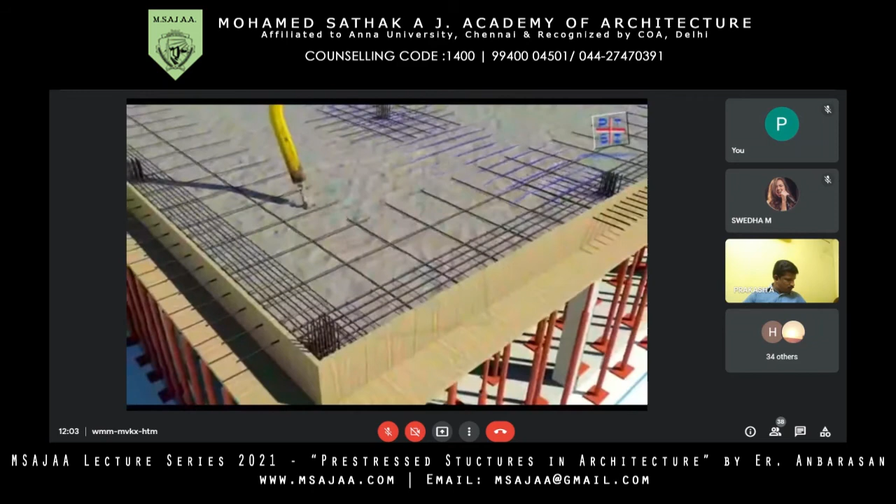Yeah, this is actually a video related to post-tensioning. Okay, so they haven't done prefabrication. They have completed the concreting. Then they will go for the extension of the steel. Yes, after 28 days. This is a post-tension concept, whereas in our concept, we are going to do it at the initial stage itself. So we are going to remove all the wedges.

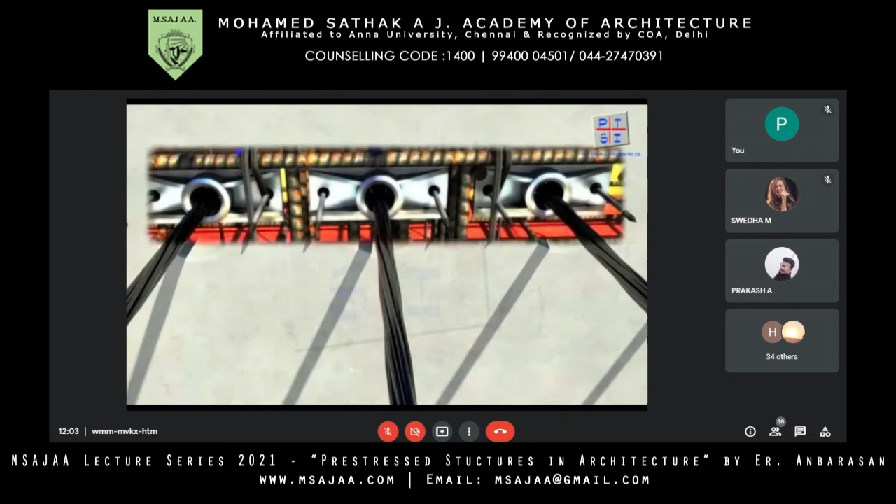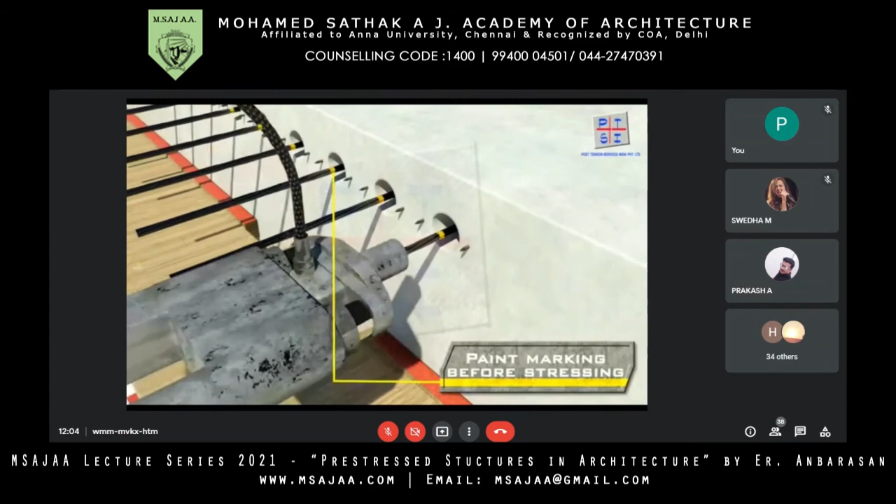Then we are going to make a mark. So by paint, we are going to make a mark in order to cross-check how much extension or how much length extended. So placing of wedges. The wedges will hold the bars in a proper way with proper anchorage. Then hydraulic jacks will be provided at each and every bar, and hydraulic pressure is applied.

Action of wedges. So now look here. So it gets expanded because of the friction action. Yeah, this is the one which I told you. So you will have internal cracks. All these cracks will be completely sealed by the pre-stressing techniques or pre-stressing concept. You can see a difference in paint marking. So this is how the post-tensioning process will be carried out.

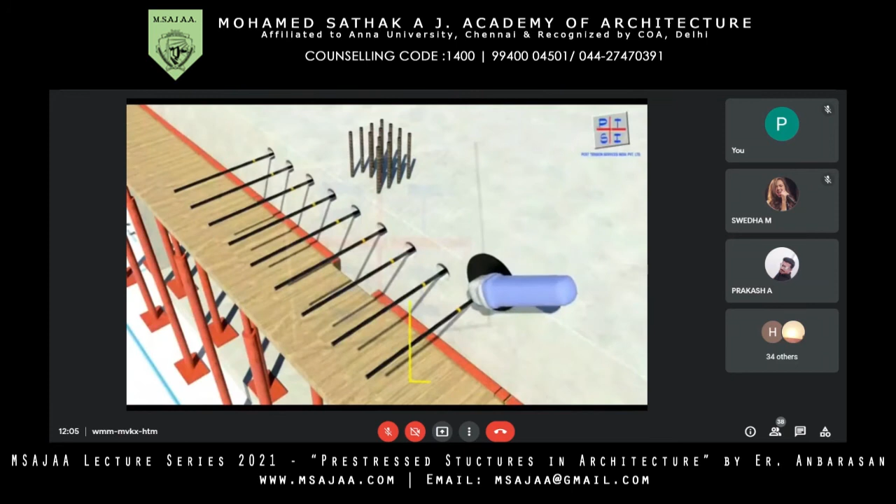Yeah, all these gaps will be filled by the sealant. This is a post-tension process actually. So as I told you, it's a post-tension actually. So we have discussed about pre-tension concrete. If there is any specific area we need to be customized, we can do the one for staircase and everything.

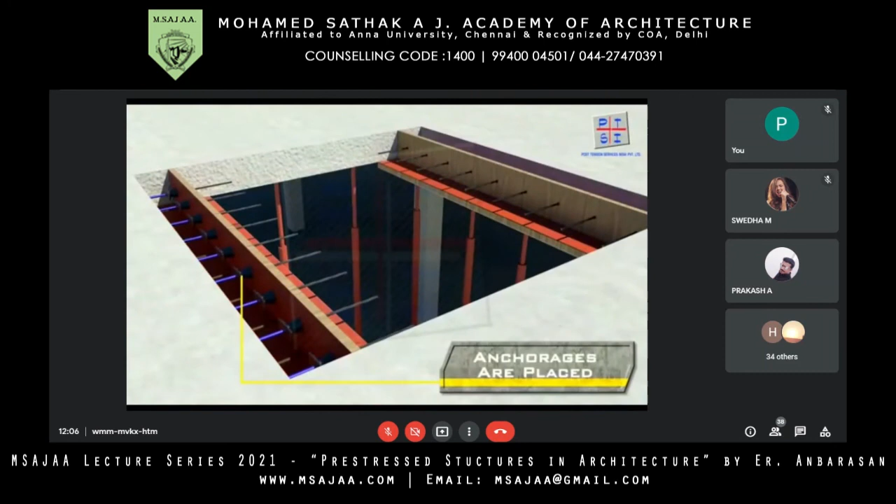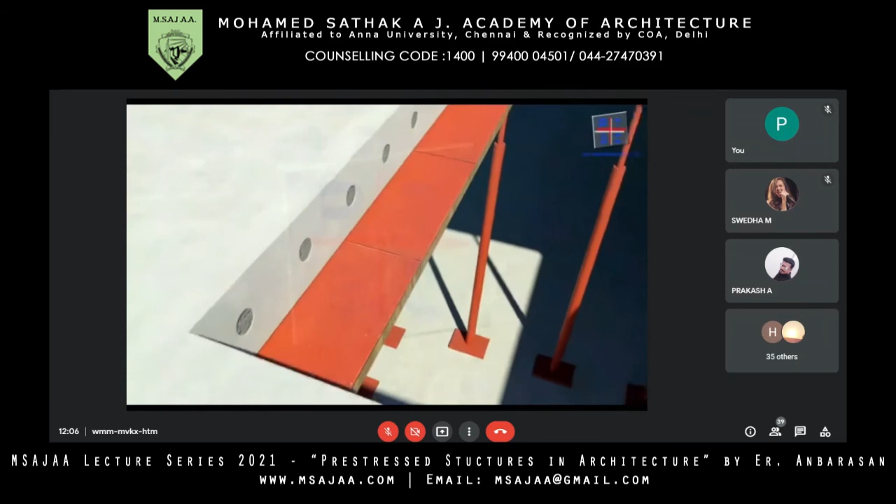Again, provision of wedges at the supports. Again, we are going to do the same process. Extra rods being cut. Gaps will be filled by the sealant. And staircase provisions.

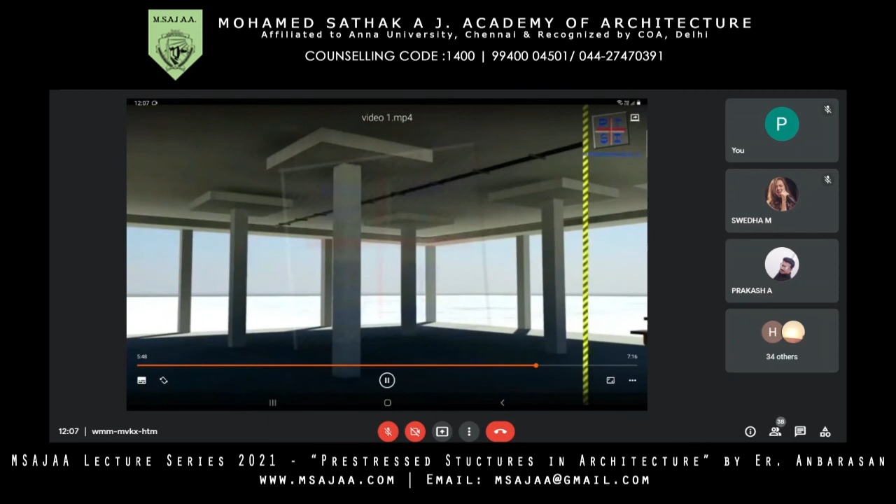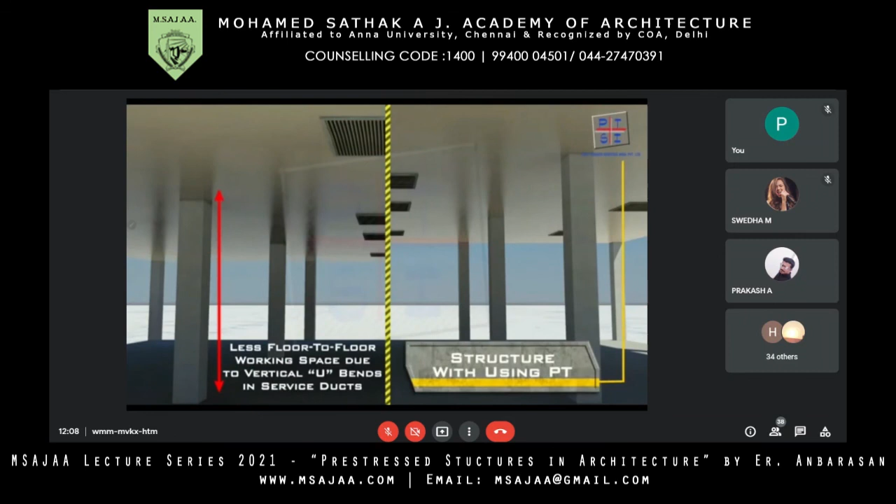Okay, so at the left hand side you can see there will be beams. So all along the sides of the beam, if there are any provisions, ultimately you have to bend the service pipelines and AC ducts, and you have to carry out the process. But here, it will be very comfortable. You don't have any disturbances. So you can get more floor to floor space.

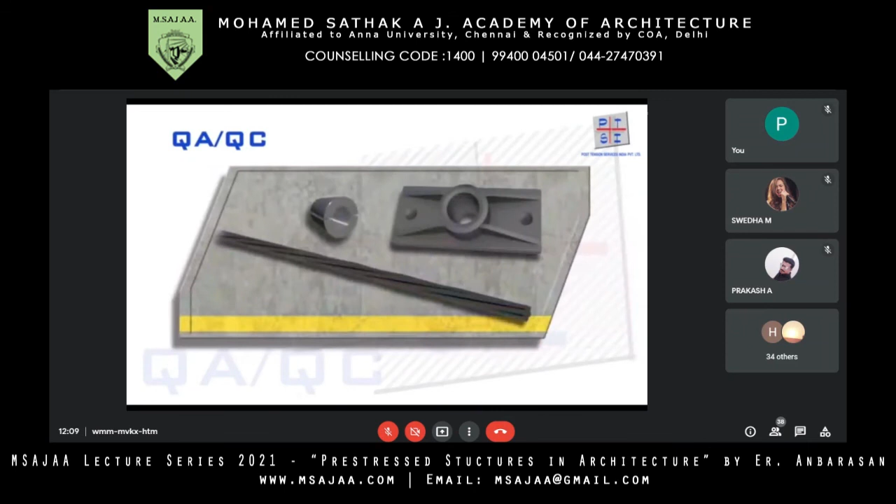Yes. So this is the video about the pre-stress type of technique, as I told you.